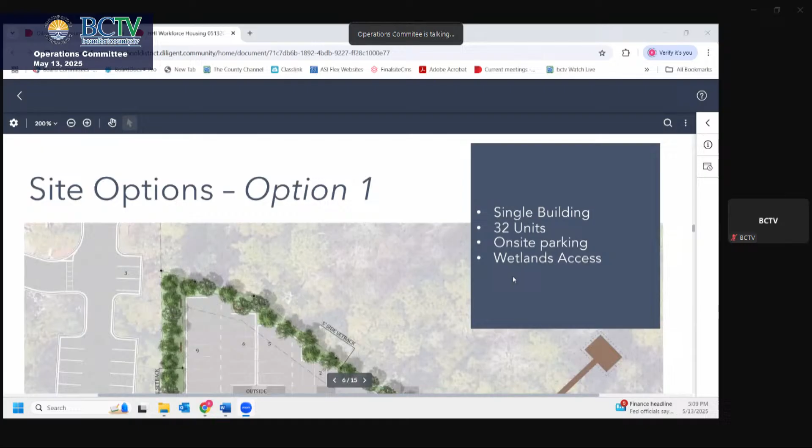So one of the benefits as well of the modular construction, you can go back up a little bit actually. So obviously, like Keith said, we've got net zero ready, which essentially means that we're fully energy efficient. I mean, these units are probably in the $40 to $70 range in electric bill every month. And then we've got impact windows and doors, which is important.

We've got 185-mile-an-hour wind zones, which even with my site-built construction can't do. So the good thing about it is these buildings, when we have an event, will be here. Your teachers will have a place to come back to. So that was really important to us as well.

But having laundry facilities in each unit, these things are very, very nice units. So it sits at 35 feet in height, which is our maximum in our zoning area. And it actually does fit on our lot and checks all the boxes as far as the density, actually 2 less than what the maximum is allowed. So we're excited about it.

But any questions related to the construction of them? Anybody have any questions related to modular?

One of the benefits to this particular supplier that we use as well is they are based in Clio, South Carolina. So it's important to note that all the dollars for this project and the local contractors, they are all South Carolina based contractors. So we're tracking that probably about 95 to 97% of the dollars will stay in state, which is a great story.

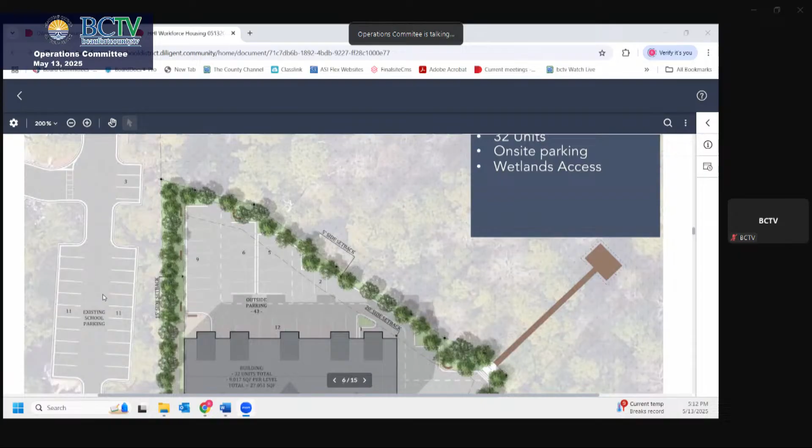Okay, so parking in Hilton Head and Beaufort County is... I don't have to tell you guys either, because you run education facilities, that parking is probably one of the hardest things for the facility itself. So we have that same constraint with the minimum parking spots required for a 32 unit building.

So you're looking at the first site plan here. This is actually taking over the buildable area of our lot. We have 4.3 acres, and this is the upland area of the lot that is actually buildable. You can see this dotted line on the top right there, that's our setback line, so we're really squeezing everything we can in there to get this done appropriately.

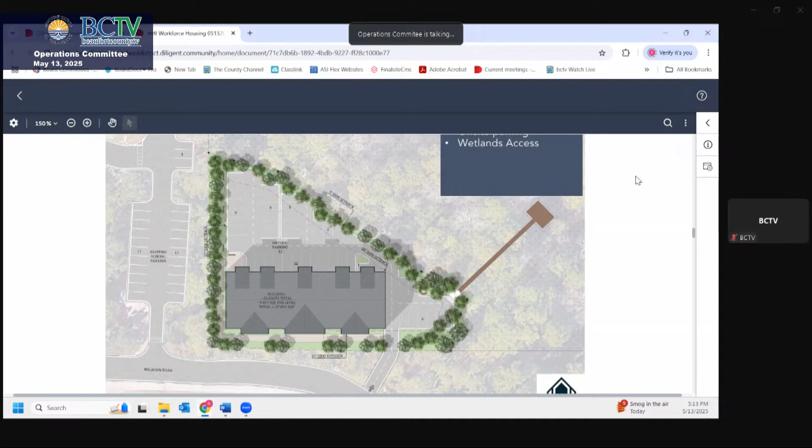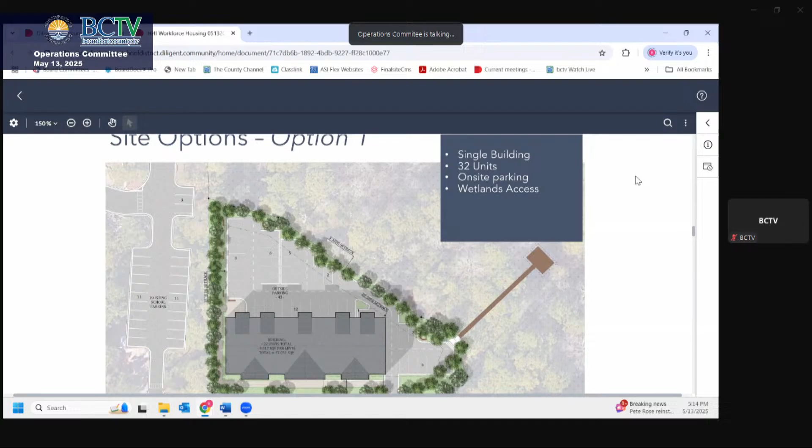But we've also decided we wanted to include, because of those wetlands, and I'm sure you're familiar with the middle school observation areas, that's the same view these guys get. So we want to take advantage of that. We do have a bulkhead going in with an observation area for bird and wildlife watching. Can we scroll down just a little bit?

Yeah, so you can see here - sorry, I know the camera probably can't see me while I'm pointing - but this is one of your main arteries that really feeds that middle school, especially the inflow and outflow. We do have school buses going through there. We are also seeing an additional curb cut here if we were to get into this community.

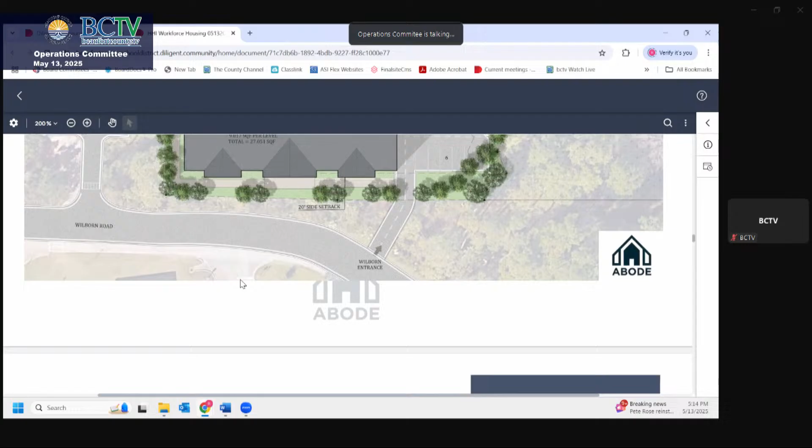Again, this area right here is the teacher parking, which is currently the staging area as well. So the next discussion we had with everybody a couple weeks ago was potentially trying to get a little more green space into this thing. This model feels very hard with all the parking.

We also have parking already designed right next door that will feed the residents whenever they're going to work or staying there. So one of the asks we've had, and probably part of the reason why we're here, is we're looking at maybe doing a shared parking agreement. And this is the next slide here.

Thank you, that was my next question. Why is this in front of us?

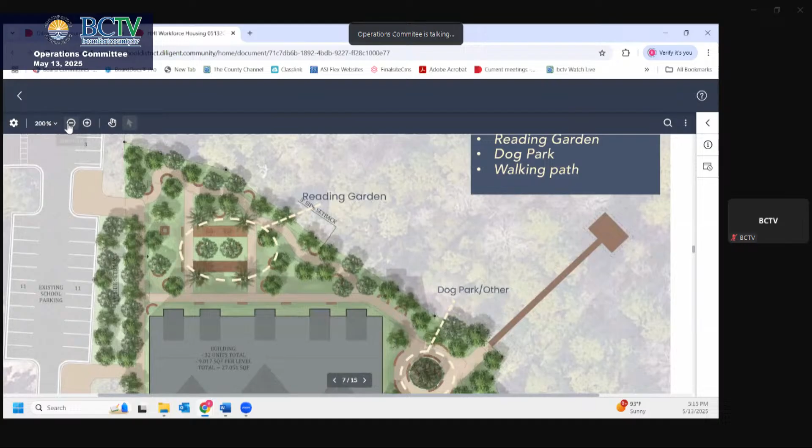Yeah, so the shared parking agreement, Keith, I'll let you explain. The shared parking agreement would allow us to access, with the school district if they agree, some of the parking that's existing for our residents. So then we can cut down and add green space into this lot, putting in a dog park, reading garden, and some other walk spaces. It also allows us to present an option to the schools to access this.

Not that we couldn't do it the other way too, but it'd be more conducive to having students going out as part of class to be part of that observation pathway. It's not a cost measure, it's just a way for us to enhance this experience for the educators on campus. Does that answer the question? Yeah.

We'll get to the residents in a second because we're planning on having this strictly for the use of the educators. One thing we discussed is a lot of those parking spots would be used by the educators anyway, since they'd have to drive to work regardless. So it's a spot that would have been filled, but now if they're living at this housing unit, they can take a scooter to IB if they're a teacher there, or walk to the middle school. If it's raining they can figure out something else, but it's all parking that would have been used by educators anyway.

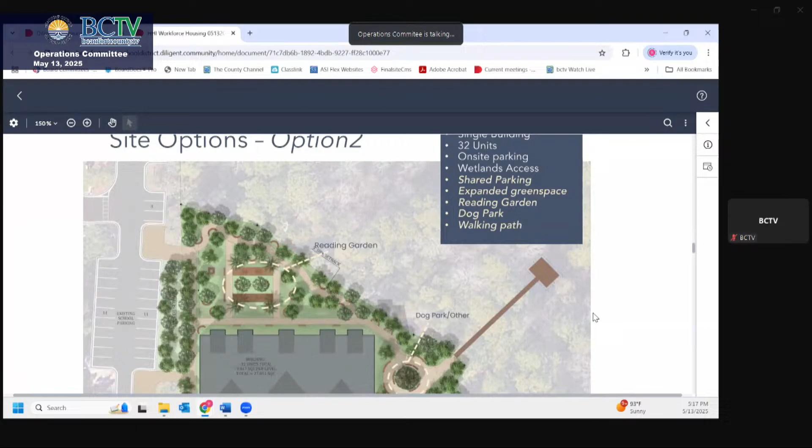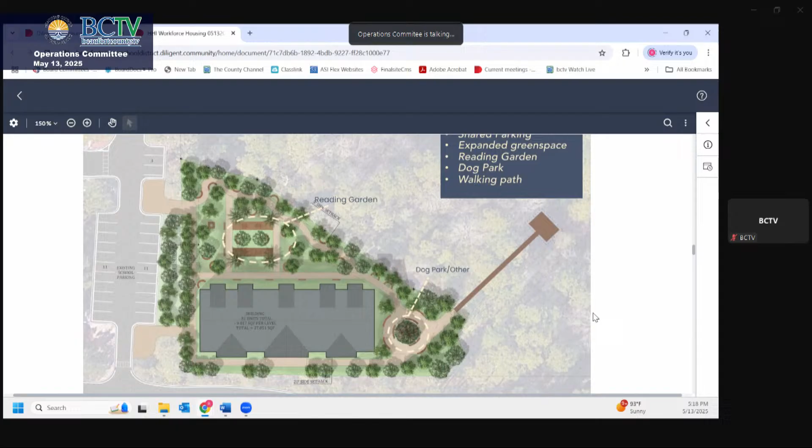We did a brief introduction that this will be fully compliant with the Hilton Head Workforce Housing Framework, keeping AMIs at 80% to 120%, fitting the bucket of starting teachers to administrators. We'll be partnering with CCDC, the Coastal Community Development Corporation, a nonprofit based in Hilton Head serving the whole county's workforce housing needs. The application process goes through them since they have fair housing licenses; they would monitor income levels, etc. We both have elementary age daughters, and I've been in the education space about 30 years, so we know how critical it is to have housing development close to campuses, not just one. Having that layer of a vetted, secure application process in collaboration with the town and county is something you never get perfectly right, but it's very strong to have.

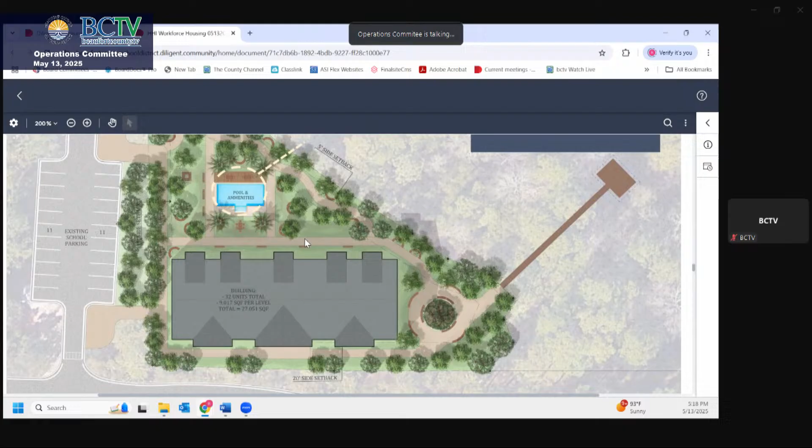One of the things we talked about too was privacy for the educators. For example, the rec center is accessible, but if they want their own swimming pool so they don't see their students on weekends or evenings—because as board members, many of us know we can go to a public event and get bombarded by everybody, and our educators experience that too—this would offer them something private.

Before the next slide, we'd have to expand the parking a bit from what exists there, which would be part of the overall project cost. But the acreage for the lot, 25 Wilborn Road right next door, is 10.76 acres, which incorporates what I believe is the lacrosse field—or is it softball? It's called the hidden field, and it's back in there; I think it's soccer. That field is on the same property as the parking, so we wouldn't necessarily be infringing on that. There's also an additional parking lot where they used to sell Christmas trees.

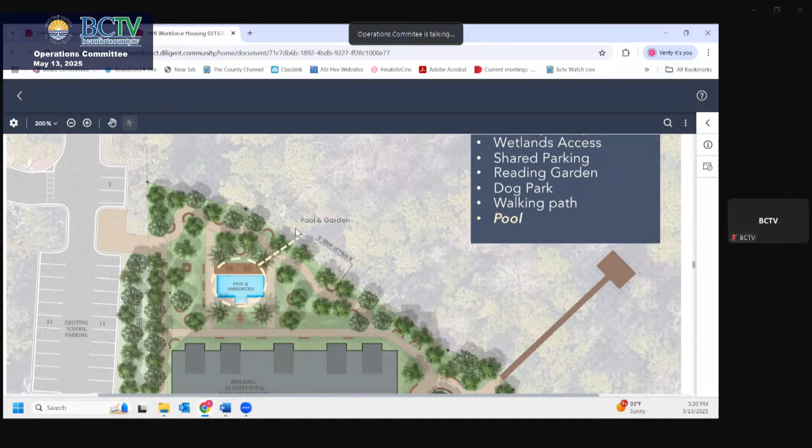Just to show the potential, if this project took off with high demand—not only from the island but even from Bluffton—we had a fourth option that we won't dwell on, but you have it. The next slide shows what a second building could look like if there was county interest in that space, on your property as well, as potential expansion if you saw an uptick or high interest from teachers and administrators. Just throwing that out as an option.

For context, what's currently built is this loop in place, so there's an option right there off the wetlands. If this becomes a remarkably successful endeavor, maybe we can discuss it later, but it's just to show there are options for the future.

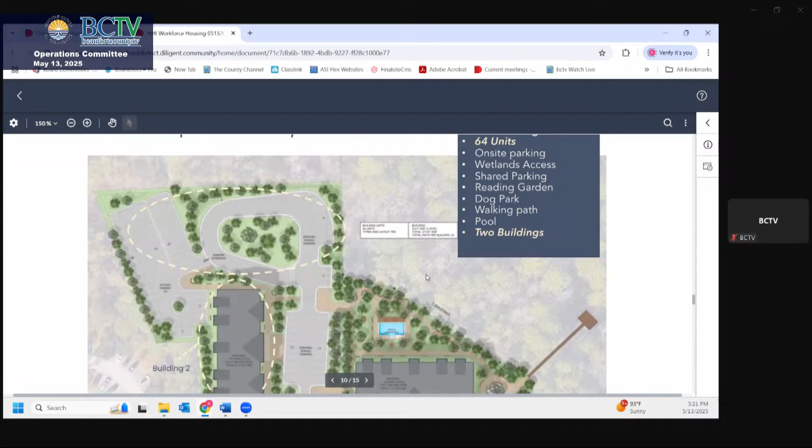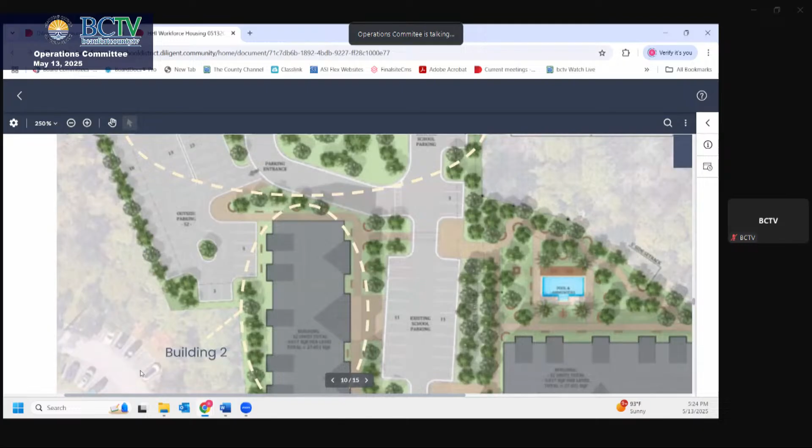I have two questions. First, I want to clarify the future plans on slide 4 - we're not talking about infringing on any of the fields, right? It didn't look like it on the drawing, I just wanted to clarify. It is currently green space where that is, but we're showing this as just kind of a fun slide of what, if we can make this successful and all of a sudden we've got 32 people and 32 more sitting there going we need one too, we have the capacity if we can come to an agreement.

This is really more directed at district staff, because the high school does have 3 fields and they call that the hidden field, but it gets used like crazy because we don't have a middle school field. So I wanted to point out to the district staff that we can't go down a field.

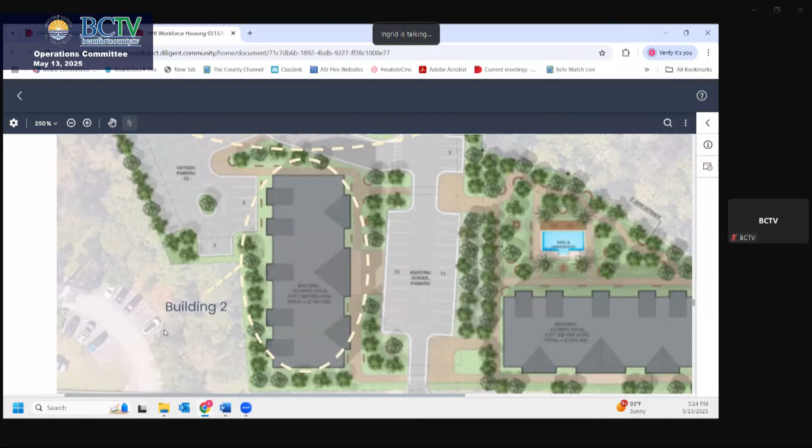The other thing is, I think what the district needs to look at with this - our traffic around there is horrendous already. I've been hit, I've seen kids hit, it's backing up onto Gumtree, and Gumtree kind of gets to be a mess. You're going to have to think about how you direct that traffic because people will try to cut through those parking lots. That's going to be an issue, because the way Hilton Head has all 4 schools clumped on one round road - I'm sure they thought that was a good idea at some point, but it's kind of a nightmare. So I definitely think the district needs to be in partnership with you guys to figure out if there's an opportunity for better traffic flow around the schools.

I think that's a tremendous point to bring up.

One thing we are considering is that we're hoping 90 to 100% of these residents are working on these campuses. Ideally that would limit some of the high traffic times in the morning. You'd still see some of that, students coming in on buses, but it would be the off hours where ideally that's when the schools are not at their peak traffic.

The other component is that in this shared scenario, scenario 2, where we look at shared parking, we would not have that curb cut into the lot. We would use that through the teacher parking, so you'd have one less pinch point for another turn-in. We'd absolutely do that parking study in conjunction with y'all on that. Just wanted to add those two points.

That makes sense, any opportunity to get that flow better. I've been at Hilton Head High since 2013, and people have been asking why can't we build a cut-through, at least for emergency egress type of thing. So I think you'll have tremendous support from the community. I think it's a great idea.

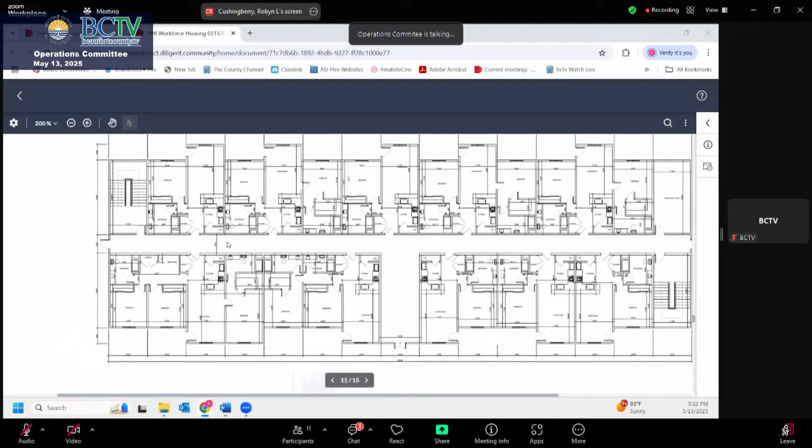From our research, I think you could fill it. If you look at, I think we have slide number 2 or 3, the one that we nicknamed the Uplands, you have 85 teachers at the high school, 66 teachers at the middle school, and 77 at the elementary school. I don't know what the projections are for the expanded high school, but I'm sure that population growth will increase that. So there's a nice pool there. And then you think of the rec center and Boys and Girls Club that are approximated as well.

Well, and currently in the current market, a lot of people are looking to sell their homes. So if there are even educators that are currently in a home that they could double their profit on, if they could sell it and get into one of these—just like Ingrid said, so many people are like, let me dump this massive asset that's a drain on my time and energy—they could end up in one of these units, depending on how Frank decides to utilize it. He may decide he wants this utilized for new teachers to the area. It all depends on how this ends up being used as a tool.

And could I go back to my second question? So I get the sense you're willing to codify the utilization restrictions as they apply to the school district, so I'm very pleased to hear that you're willing to do that. The second thing is on where you put more greenery in—I think it was slide 2 or 4 up near the beginning—is that all within the boundaries of the 4.3 acres? Yes, sir. Okay, that's good too.

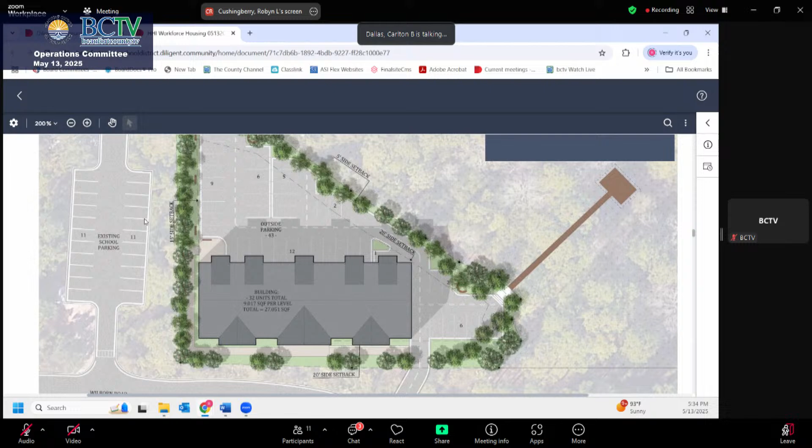If you look at the tree line, I think that's a good demarcation of what is buildable, and then the wetlands are beyond that. They're a little faded out there, but the property actually goes out into the walkway. And then my last comment is on the AMI rates—we have mobile homes on the island that are going for $3,000 plus a month. Yes, sir. And so this is a very, very attractive rate that you've produced so far. So thank you.

Quite a lot of credit to the county and to the town of Hilton Head on building this framework. They've gone out, it's now starting to take hold, and it's really given organizations like ours an ability to explore this idea. So I'm very thankful for your time and great questions.

Any other questions so far? Who's the property manager? Is it CCDC? Yes, CCDC's. So they'll be the property manager, changing out light bulbs, fixing HVAC, and all that kind of stuff.

Even one of my major concerns, which I'll voice since this meeting is publicly accessible - being a mother of young children, seeing this go in near all of our schools, is the vetting of any adult living there. I want them cleared for violent offenses, pedophilia, whatever it may be, so that no one with a background such as that would be able to live there. For example, if a teacher applies to live here and their spouse is a pedophile or has some kind of violent offense, they would not qualify to live in this building.

That was critical, thank you for that point. That was critical for the partnership with CCDC. They have the ability, under fair housing rules, to do the proper vetting on anyone who lives there as an adult. There's a lot of discussions that are going to be happening in the future about the design of that, and everybody in this room will have an active impact on that vetting process and designing it out.

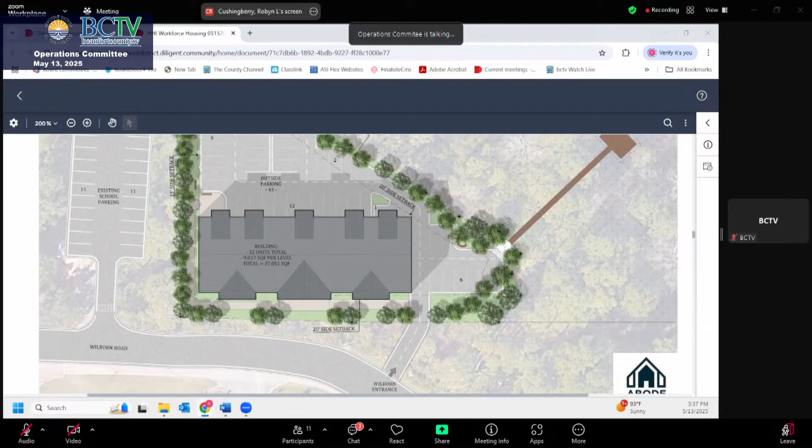The second version is if we come to some agreement on them using the parking lot, then we could have greenery or a swimming pool for the teachers. And that dock Keith was talking about, over to the right, is basically a marsh observation area.

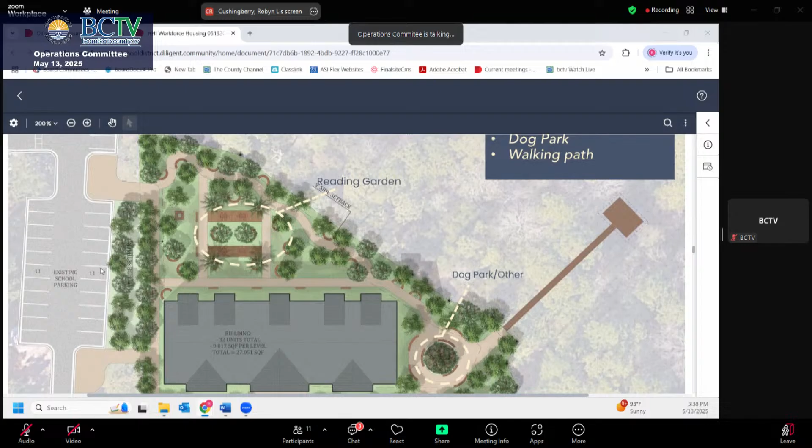And yes, we know the teenagers are back there based on what we find. The lot is currently pretty hidden, but it's also pretty flat already, so it's a hidden gem - when Keith first took me back there, I had no idea this was beyond the tree line. But it's pretty much geared up and ready to go.

We did have a natural resources permit to do some bush hogging back there. If anybody would like to set up a field trip to come see it, I'd be happy to walk you through it - it's pretty clear too, so just wear boots or sneakers. Mr. Chair, I would like to take them up on that, to actually go view it.

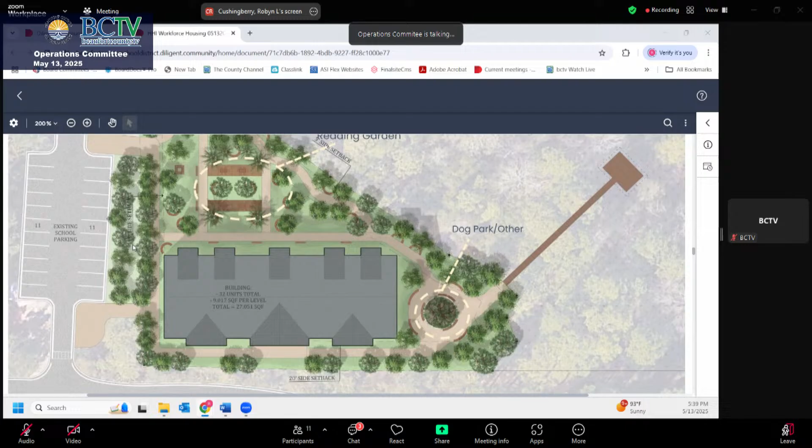On that same note, we've taken this approach with the hospital project as well. We'd love this building and design process, if it goes forward, to really be community-involved - including elementary, middle, and high school students and teachers in classes to watch the process and be part of the talks. The modular build will be pretty exciting to see - it's real life Lego building. You come in for maybe a 2 or 3 week period with a crane, and they pull one module in, and we can set the entire building in the middle in about 6 days.

So we think some projects that with ACE or any of the CTE programs, science and engineering, to be a part of it as much as possible. There's opportunities for the wetland cleanup as well for volunteer and those things - we 100% want that to be a part of this program if we do that together. We're also welcoming, like our reading garden and maybe even the observation, if there's a specific teacher that comes to mind for naming rights on things too. So we really want to keep this as a community-based project for the school district.

And we would like this scalable. We're hoping that this is a successful enough model that we can bring it wherever you guys need it. Got some other places, but yeah.

But we're passionate about this. I have a 6th grader right now at St. Francis - sorry - she's in ballet and does the ballet studio at the high school. We were there last weekend for a performance, and she just looked at the high school and all the work going on, and she said, 'I want to go to school here.' So on a personal level too, we're sitting here going, we want the teacher force as strong as it can be. We have 6 daughters under 6th grade between the two of us, so this is their future home as well. So it is very personal to us.